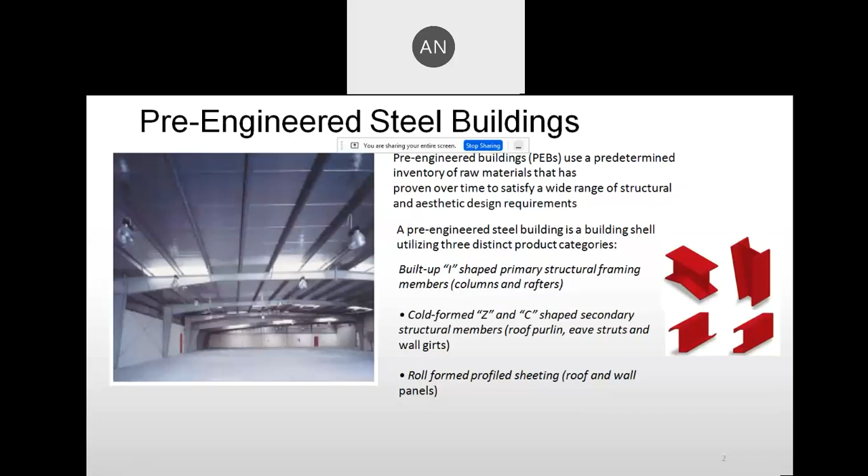When we use tapered built-up primary structural members, when we look into the bending moment profile of a frame, these sections will match the strength requirement. These sections will be fabricated to match the section requirement based on the stresses the building is expected to experience and resist. The profile is matched to that, and if we do that, it gives us roughly a weight advantage of 40% when compared to our conventional hot-rolled sections.

These pre-engineered buildings are made using steel plates - these are all built-up sections. These PEBs can facilitate wider clear span capabilities for major frames.

Longer economic spans are possible, with lower weight of overall PEB steel structure - that is, the tonnage of material consumed per unit area of building construction. The weight advantage in main frame rigid frames, compared to hot-rolled sections, is very pronounced. The use of cold-formed Z-shaped and C-shaped sections for roof purlins or wall girts can also give us around 30% weight saving compared to normal hot-rolled building components.

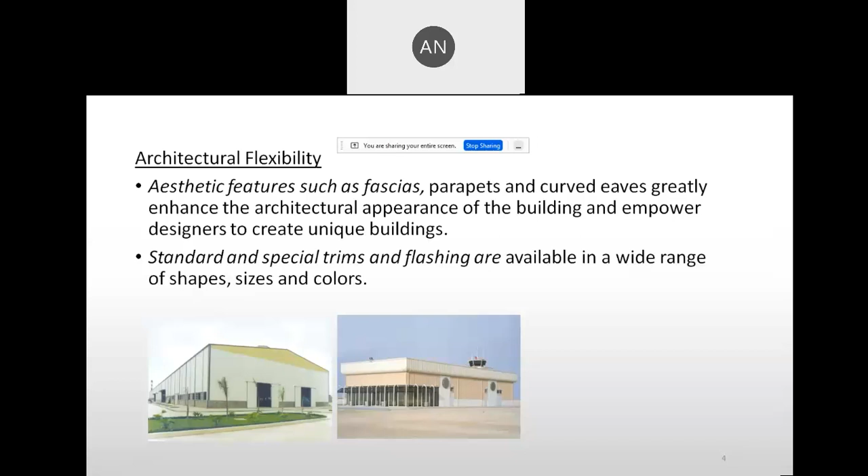Aviation and military - if we talk about aircraft hangar structures, where it demands large clear spans up to around 128 meters, it is possible with PEB.

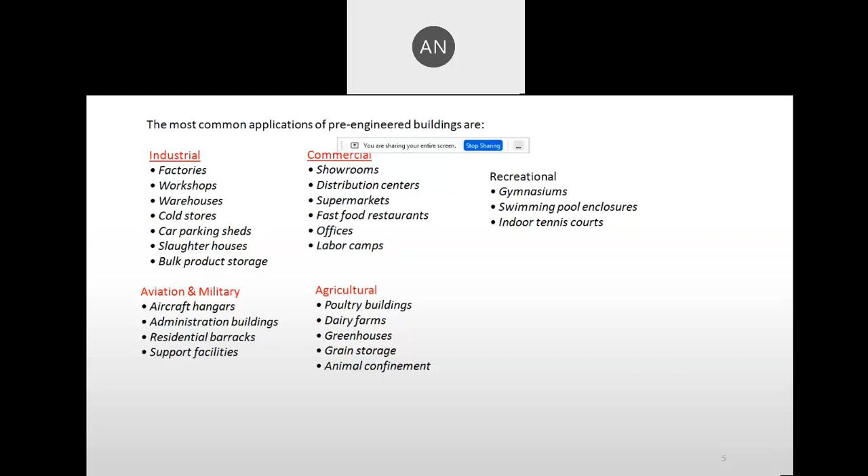Agricultural structures - it could be poultry farms, dairy, greenhouses, yes, grain storages, animal confinement structures. All these things are possible; PEBs can answer them. Their basic advantage is that they can accommodate large clear spans.

Now, there are a lot of configurations of PEB. Usually what you can see here is a multi-gable building with 4 gables each. It is just shown as 4 spans, but it can be multiple - it can go in any number of bays. It can go along, but the only issue will be maintenance.

In this type of building configuration, annual maintenance is very tricky - grit and any deposits in the gutter, in the eaves. There are too many intermediate eaves, so any blockages there, any hauling away of rainwater would be a challenge. Draining away drainage from the rooftop would be a challenge.

Monoslope roofs - you can see the gable roof here, multiple gable roof, one snapshot here. For the monoslope, the frame shown above, the photo need not match, but it's just an indicator as to how beautiful it looks - a monoslope roof.

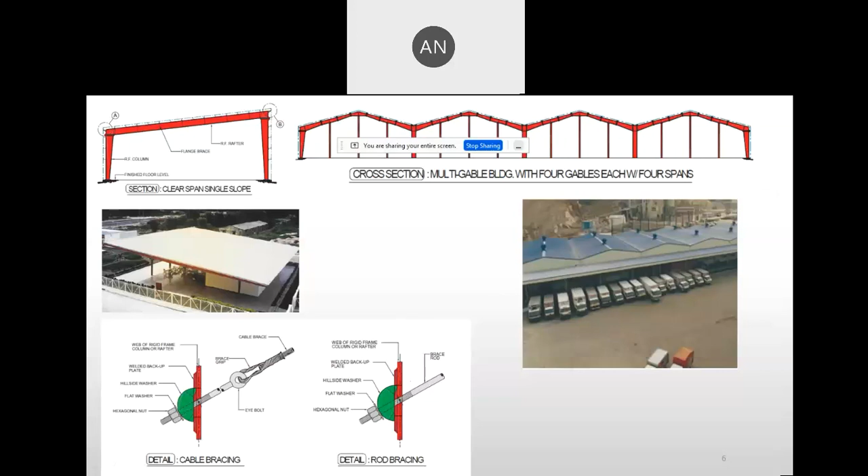In PEBs, bracings are very, very important. Bracing system - we will talk about it in further slides. These are all the general components of a pre-engineered building.

The sketch projected here on the screen indicates wall panels, supported on the girts - G-I-R-T-S, girts or wall or cladding runners. We have roof purlins with sag rods. Sometimes it is also provided with bridges, called purlin bridges or even sag arresters. These are all nomenclatures, terminologies we have to pick up - roof purlins, eave struts, rafters, columns, bracings.

The corner trims - whatever you're looking at in this color, the edges, the corners - these are all called flashings or trims. This is given to prevent any sort of leakages, and it adds to the beauty as well.

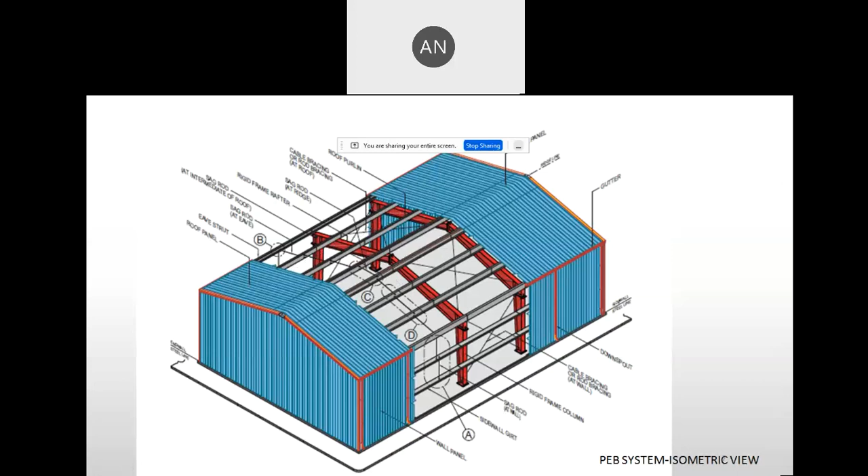These are all the bracing systems. Design of bracing system - it can be cable bracing or rod bracing, or from structural members like angles, channels - all these are used for bracing systems. It depends on the forces encountered in the analysis. It can be tubes as well, pipes, tubes - all these can be used for bracing systems.

If we talk about how the bracing system is fastened diagonally, how its connection is seen, you can see detail C. Detail C gives you the central connection detail - it will have a connecting plate. One bracing member will be continuous, the other will be connected like an angle brace with high strength bolts. This bracing system will take care of lateral sway of the building.

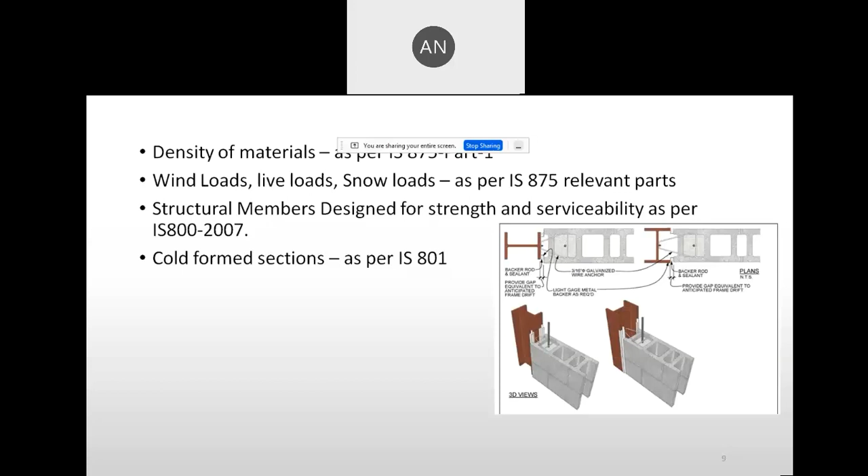There are building codes which we have to use along with these design codes and provisions. Building codes in the sense National Building Code, or it can be Uniform Building Code, UBC. It can be used - it will give us a lot of relevant parameters to be used while designing PEB.

Some certain nomenclatures which is good to know about PEB. Bent plate - a plate bent to form an angle, that is very well known. Whenever there is any angular construction apart from 90 degree right angle, the plates are forged to form that angle and it is used. So it is just a terminology used there.

Bill of materials or bill of quantities, BOQ, that is very much necessary. Once the configuration structural design is in place and all the geometry is fixed, we can arrive at various quantities involved in construction to cost it. So bill of quantities will come into play.

Bill of quantities is nothing related to design - it is more on governance of the project related to various quantities involved in construction. If we look into building components, bird screen or bird mesh - it's a wire mesh fixed over the top of the wall panels under the roof, at any gap, just to prevent any bird from entering into the occupancy area.

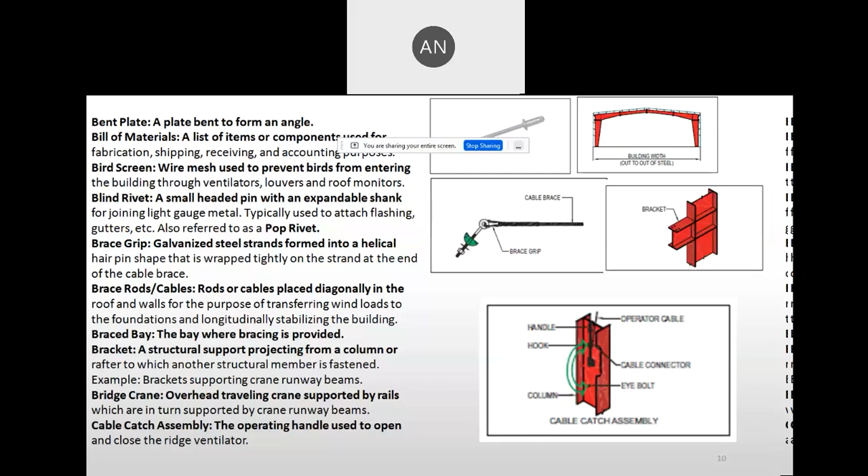Building width is the lateral width of the building measured out to out of the side walls. Side wall steel lines means exactly column to column measurement.

Built up section, all of us know, is a section which is not available in the market but is prepared and made to suit the design requirements using flat plates. They are fastened together, welded together.

Butt plate is again a splicing means - it is also called an end plate. Cap plate is used over columns. Sometimes cap plate is also used at the end of pipe structures as well.

Girt or cladding runners are given to fix - they facilitate reducing the unsupported length of vertical members, and they also help in fixing the wall sheeting.

Building codes, as I said, are regulations developed by recognized agencies establishing - building codes in the sense we have UBC, NBC, all those things are there. Apart from that, there will be certain standardization from some organizations, some local codes, preferences, specifications, or design criteria will be adopted, customized to suit certain requirements - it can be strategic requirements.

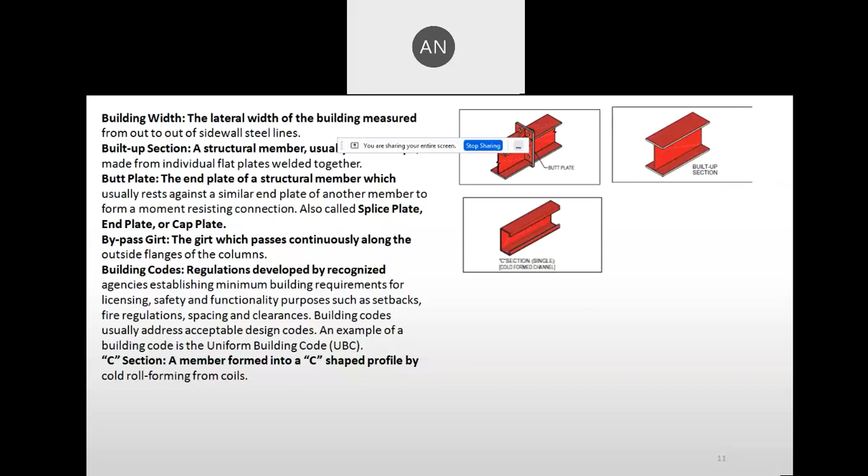Cold form sections in the form of C or Z are formed by cold roll from coils. It is cold rolled from coils.

Cables can be used - the same strands which we use for post-tensioning system can be used for cable bracing system. They are all high tension wires, used for bracing. Likely, if we have inaccessible roof ventilators where it has to be operated, ridge vent dampers or something like that needing temporary bracing, even there relevant cables can be used.

Cantilever, all of us know, it is a projecting beam that is supported and restrained at one end only.

Canopy is also a very familiar name in our industry. Cap plate, we all know, it is the plate which is provided at any one end of the member. They are also referred to as an end plate.

Catwalk is a maintenance platform. It is provided to access the mechanical equipments. Usually it is associated, given along with the crane. It is a crane corridor, adjacent, running parallel to the crane girder.

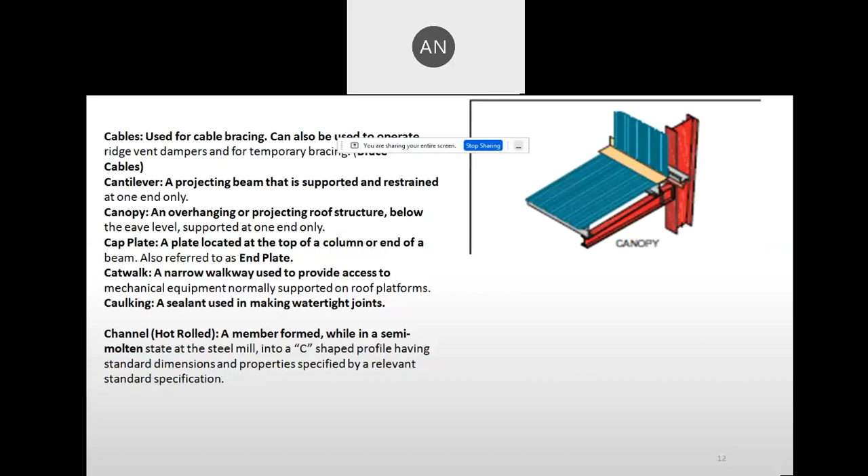Checkered plate, that is also very familiar. It can be used for flooring systems. Usually apart from checkered plate, for any sort of service structures like DG or chiller plants kept over roof, gratings are used.

Apart from checkered plate, which will not drain off any surface water or rainwater, grating can drain it away easily. Maintenance will be very much easy. It is sturdy, can be designed as MS grating floors, or there are heavy duty grating system flooring systems available. It is prefabricated as well, but can be manufactured at site as well to suit the requirement based on the equipment's necessity.

All those things are followed. Clear height of the building is up to the knee from the occupied floor. Clear span is between knee to knee, you can make it out - it is the minimum clear distance available. Clear span.

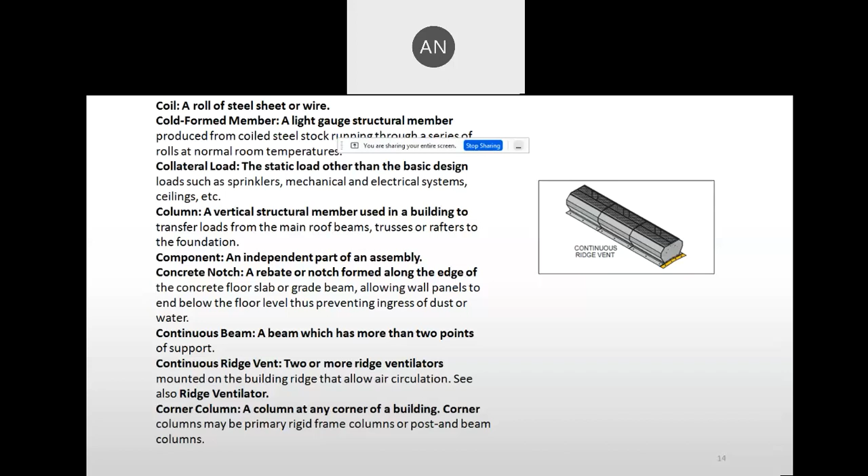Counter flashing: whenever we have buildings with dissimilar heights, where a wall connects to a roof sheeting of the building at a lower level, whatever flashing or trim helps to seal down and prevent any sort of leakages is given there. So counter flashing is given there.

Crane, all of us know, it's a machine designed to lift or move material. This is very much evident everywhere. Crane bracket is a bracket which supports the crane assembly.

Crane bridge can be just one or two girders or box sections. It can be a gantry also, supported on end carriages.

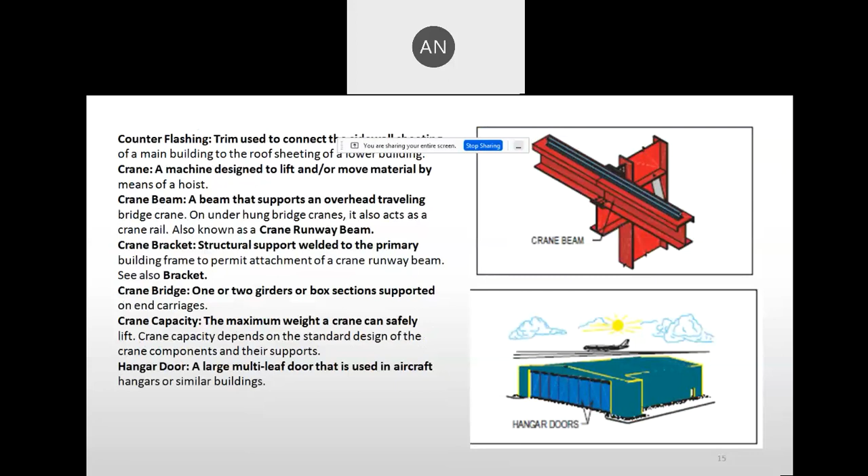Insulation again can be in the form of EPDM rubber, a rubber system. It can be as small as 10mm, or it can be glass wool. This is just to bring down the heat load into the structure.

Splices, again, can be a column splice or beam splice, wherever the sections change drastically. This also helps ease the fabrication at site. So minimum splices are better, but it's optimized to suit the site requirements as well.

Pilot door is nothing but a wicket door, similar to what we call a wicket gate in normal terms. Usually when we talk about large span pre-engineered buildings like aircraft hangars, even the doors are pre-engineered structures, called sliding foldable doors.

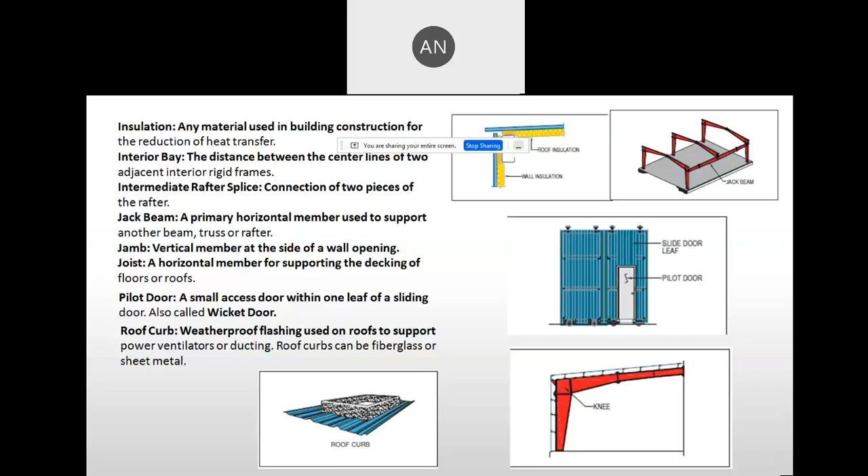I will go to further slides, which cover one more very inviting technology — pre-engineered construction with Concrewall system.

It is called a Concrewall system, not concrete wall. It is a sandwich panel yet again.

These panels are composed of self-extinguishing polystyrene sheets assembled together, and they also have a welded wire mesh. Welded means fusion welded wire mesh, as small as 2.5 mm to 3 mm, closely spaced, with external structural shields like structural plaster, which will go up to around 35 mm.

It is seen to perform very good. These panels, single or double, can be used as a vertical structural component for walls, horizontal structural members like flooring systems, and also for cladding systems, internal partition walls, or it can be customized to even help with certain internal furniture. It can be customized to manufacture furniture like conference tables and dining tables and so on.

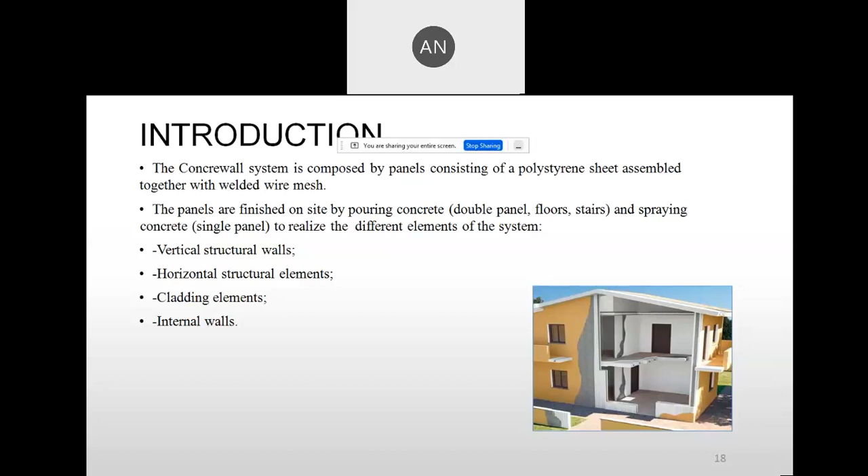Raw material for this is steel, zinc coated steel wire mesh. The mechanical property: 2.5 mm dia is a high tensile mesh with around 700 Newton per millimeter square tensile strength, and yield strength around 600 Newton per millimeter square. For 3 mm dia, only these two diameters are used now - yield strength is around 680, tensile strength is 750. It looks good. Elongation is more than 8%.

Expanded polystyrene is self-extinguishing. It is compliant to most of the international stipulated values, and this material is suitable for building construction. Usually density of the material should not be less than 15 kg per cubic meter, and this satisfies that criteria. It is also compliant with Euro Code of Practice and testing standards.

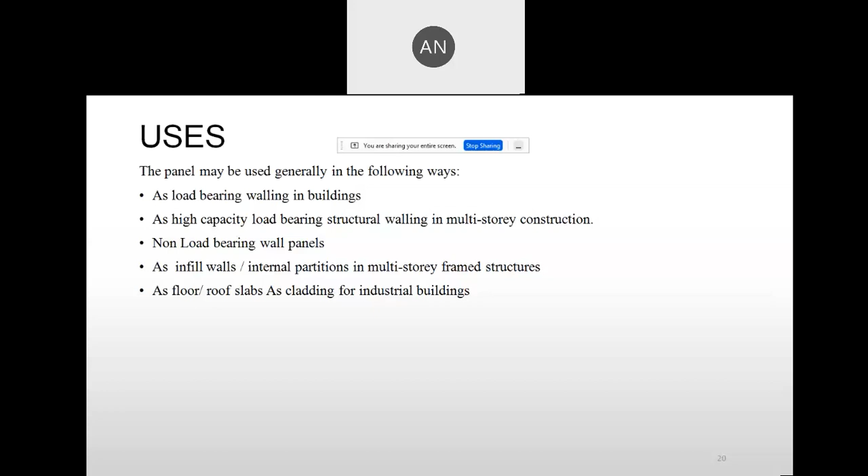Compressive strength of that structural plaster should be more than or equal to M25. So with M25 and these wires together, with the recessions in the expanded polystyrene membrane, it will create a lot of vertical columns and horizontal ribs. This adds a lot of stiffness and strength is derived, and it is called microcolumns.

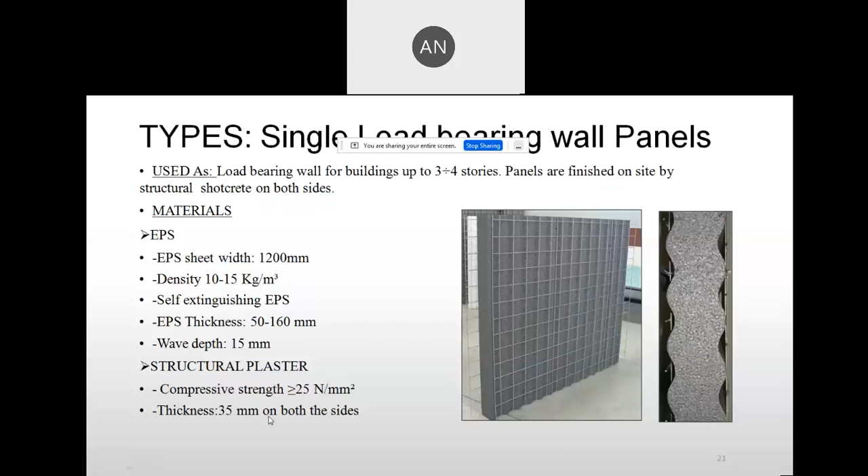You can see these are all real-time photo snapshots from the factory. We have steel wires, which is matching. There is a small extension of the wire mesh, which will facilitate overlap and splicing of the next panel coming and getting attached to this. These ribs here, along with the wire, will form a micro column.

Apart from this wire, there will be a 35 thick structural plaster. Along with this recession and 35 thick plaster, this particular zone will behave like a micro column.

There is structural concrete, structural plaster. Usually it is more than M25, but M15 can also be used. It is not Rck less than 15 - it is not less than 15, it is more than or equal to 15. It's a typographic error.

The structural plaster can be as small as 25 mm thick as well. That means if we can modulate the thickness of EPS along with external plaster thickness, it can answer many requirements. For instance, if it is a partition wall, a minimum of 100 mm wall thickness is anticipated. This 100 mm thick wall can be achieved with just a mere 25 mm plaster, where structural performance is not very much required.

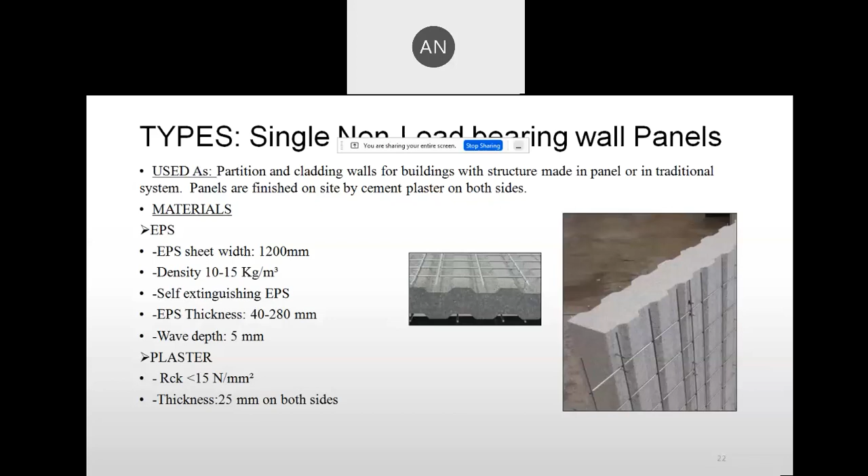So again, it is the same narrative, but with a different thickness of structural plaster. Various possibilities are there - it can be used for floor and it can be used for floors and roofs.

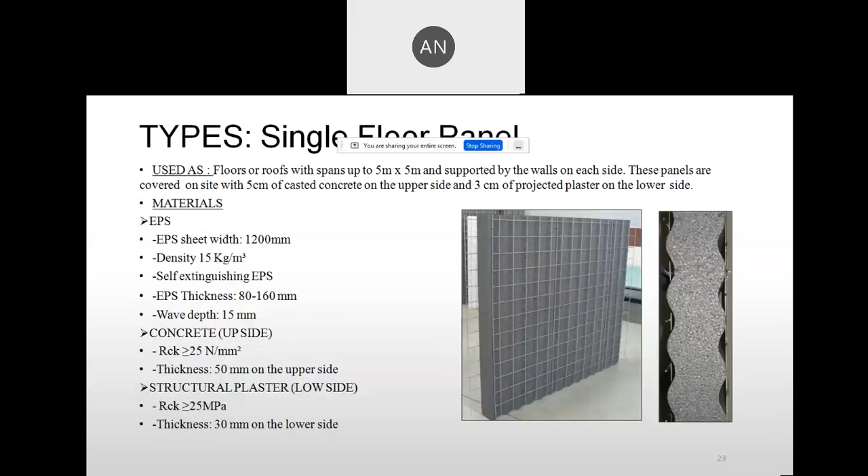This ribbed panel is meant for floor systems. This sandwich panel flooring system cannot totally obviate the use of our normal reinforcing steel, but it will be minimized. The majority of the stiffness requirement is satisfied by the structural plaster along with the high strength wire mesh. Our normal HYSD reinforcement is used just as a coupling or connecting medium, meant for splicing. That's all - its requirement is very much minimized.

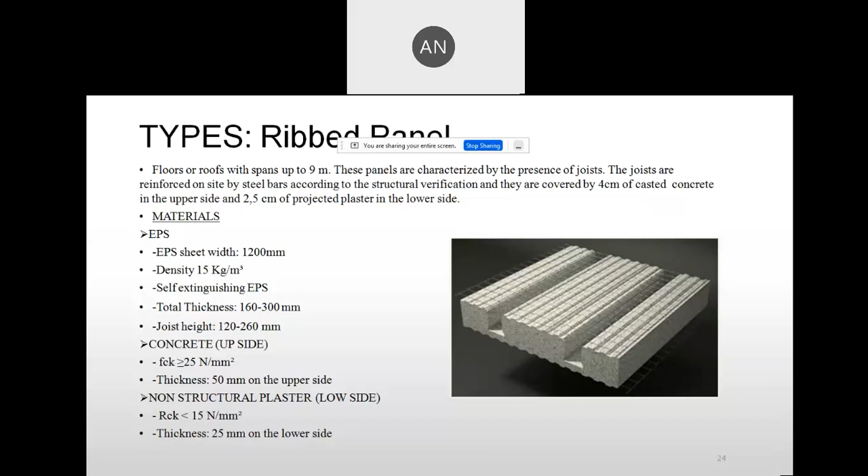This is under research - the use of these kinds of panels to answer the requirements as a shear wall in a building. This research is undertaken by IIT Roorkee, and it is still in process. There is a lot of hope that this can answer many questions.

So the gap between these two panels is concreted, poured to have a very solid and rigid wall structure, which can be used for larger stories, higher number of stories. The same configuration is now being tried over - can it suit the shear wall requirements?

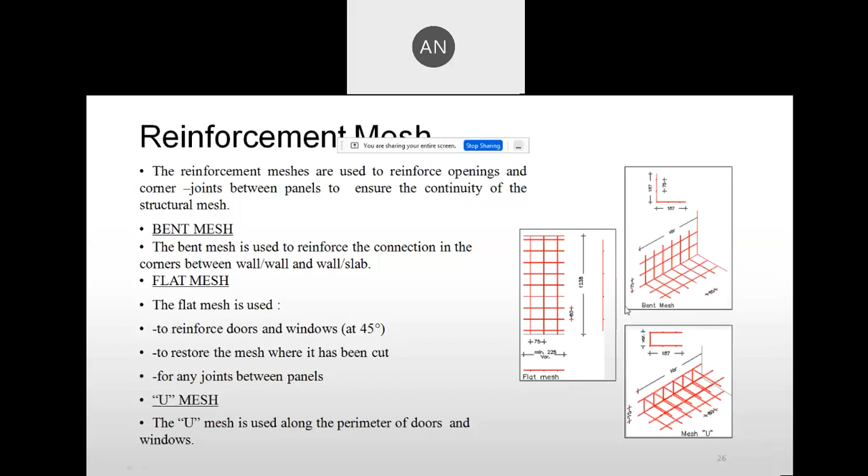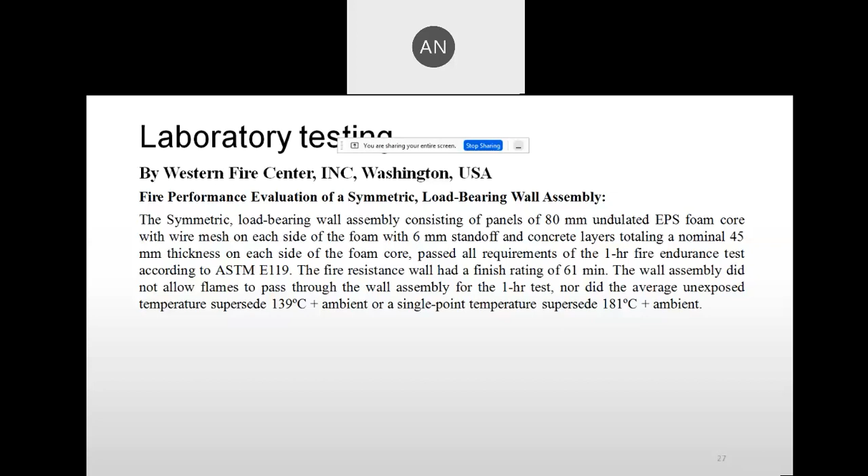Lot of laboratory testing from the other world - all these tests are done to see whether these materials are compliant with various codes of practice. This material has stood tall to answer many of these compliances. It is fire resistant - a 100 wall panel is 1 hour fire resistant, a 150 wall panel is 2 hours fire resistant. It is being tested.

According to Giordano Institute Italy's report, for a Single Panel Concrewall, PCS is the name given to the panel. It is just 80 thick, and its thermal transmittance is only 0.557. Whereas our conventional materials, brick is 0.85 and concrete is 1.5, so we can see there is an advantage in thermal insulation as well.

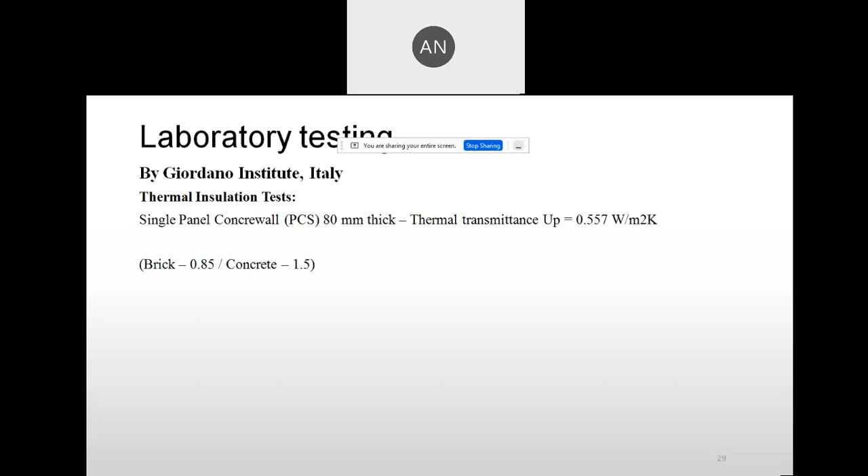On acoustics, in industrial areas the permissible limit is 75 decibels. In commercial areas it is 65 dB day and 55 dB night, while in residential areas it is 55 and 45 dB during daytime and nighttime respectively.

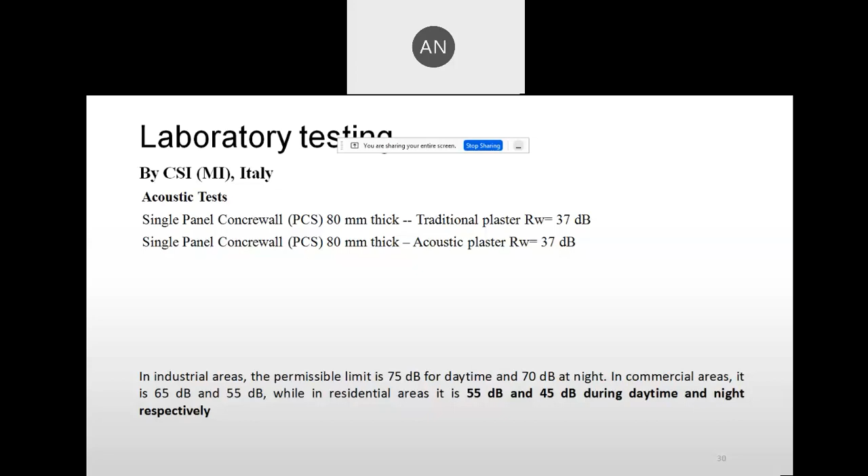But you can see the numbers here, which is really pleasing. A single wall Concrewall panel, 80 thick, with traditional plaster, gives an advantage because of the EPS - 37 decibels, both with acoustic plaster or traditional plaster. These eco panels can offer 37 decibels of acoustic insulation. It is an advantage.

Water penetration test: 3 hours, no water penetration seen. Now trials are underway to test it for a 24-hour water ponding, and it is hopeful that there will be no leakages.

Missile test: again it was tested for worst possible missile impacts, and also hurricane. A hurricane picks up a lot of trees, and once it recedes, it can plunge any sort of broken trees or even metal units into wall systems. Any hurricane of 55 kilometer per hour, it is tested for that. It can take care of hurricanes up to 177 kilometer per hour and up to around 355 kilometer per hour. It is rated to safely take 150 kilometer per hour of hurricane, and it is also tested for impacts. It is found safe. For our normal usage, it is very, very beneficial.

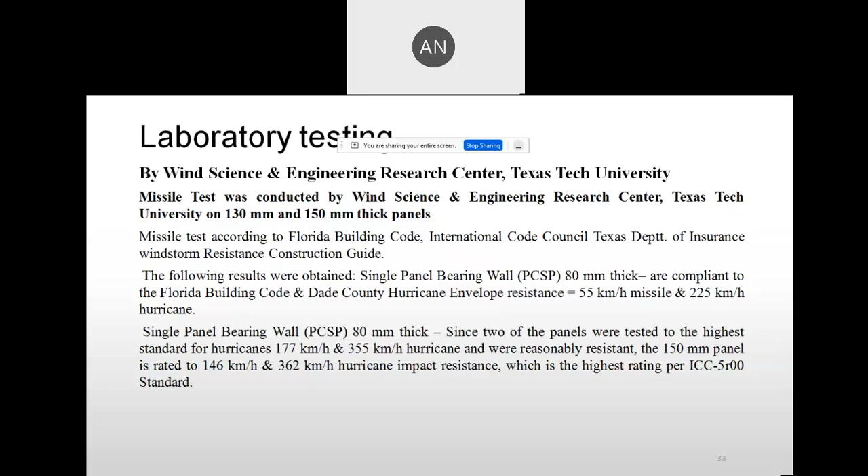There are a lot of buildings tried in Bangalore, in Mangalore district, in Coorg district. There are buildings built using this technology, one in Biddi, it's happening.

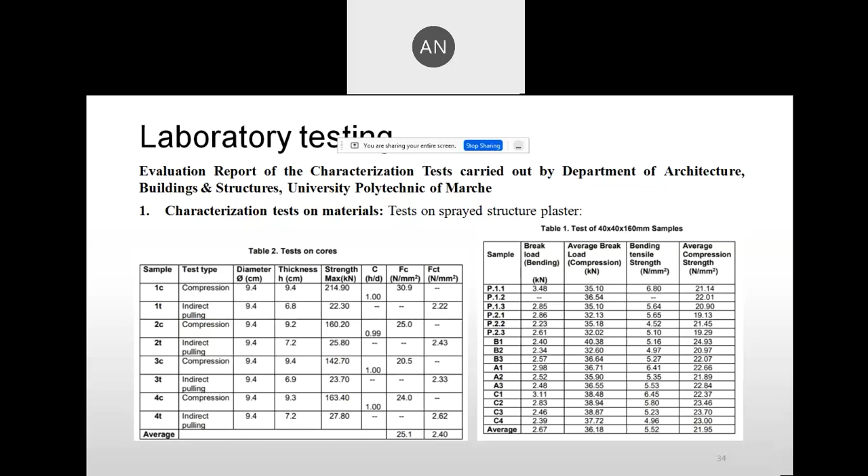There are a lot of tests on the structural plaster as well. All these are found to satisfy, including its strength, its performance, its bonding, and so on. Since this wire mesh is closely knit and fusion welded, the structural plaster is so rigid it cannot yield away easily. It is all electro welded mesh. Even pull out tests are made, and that is found to satisfy a lot of numbers.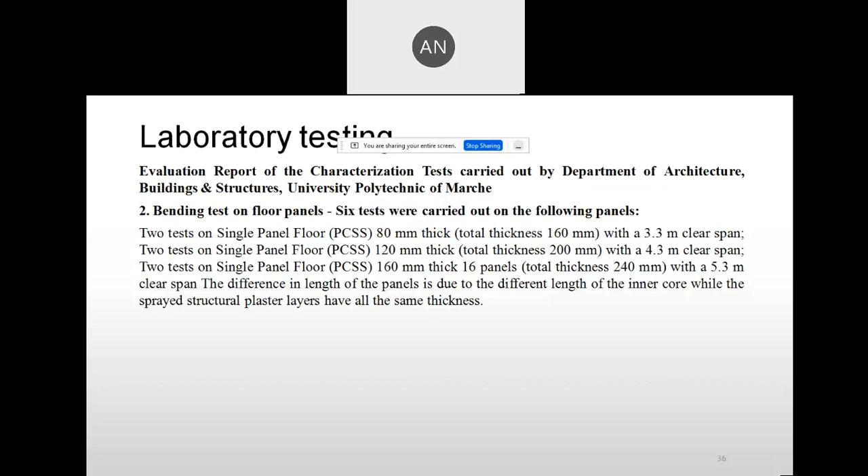Lot of tests, bending tests of off plane bending. In plane bending has got huge stiffness, but off plane bending is tested, which will help to evaluate the floor systems. This is what the test is for - it is tested for 3.3 meters, 4.3 meters, with various thickness. Higher thickness for higher panels. It is designed and used, and this is expected to answer most of our routine loading patterns, including pattern loading.

It is a 10-year-old technology to the world. 6 tests were carried out in the following panels, and again bending tests, as I said, a lot of engineering parameters are derived. It is all found to answer, all found to fall in place, all compliant.

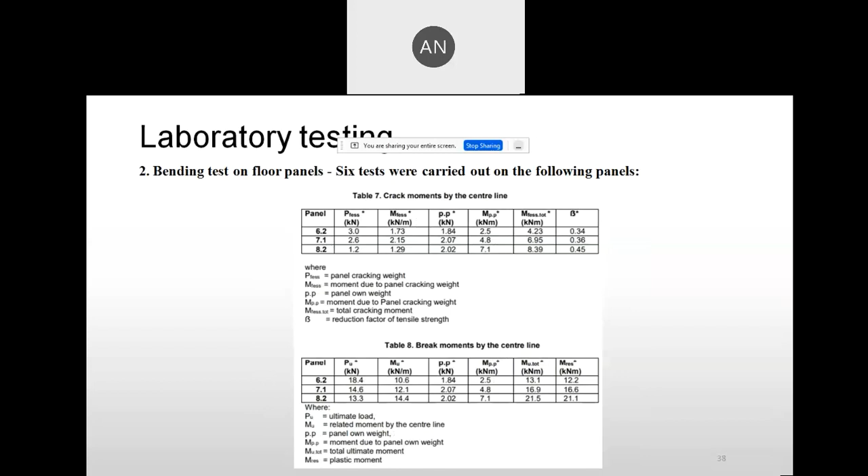Bending test on floor panels. Again, compression test - crushing load, what crushing load it can take.

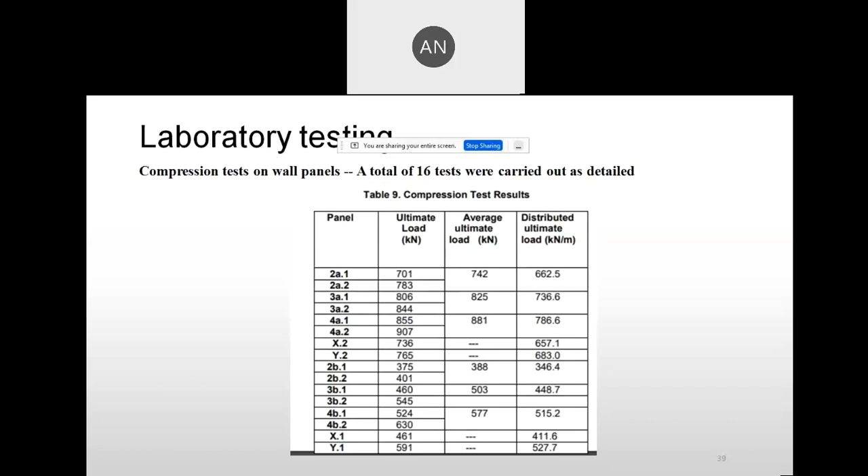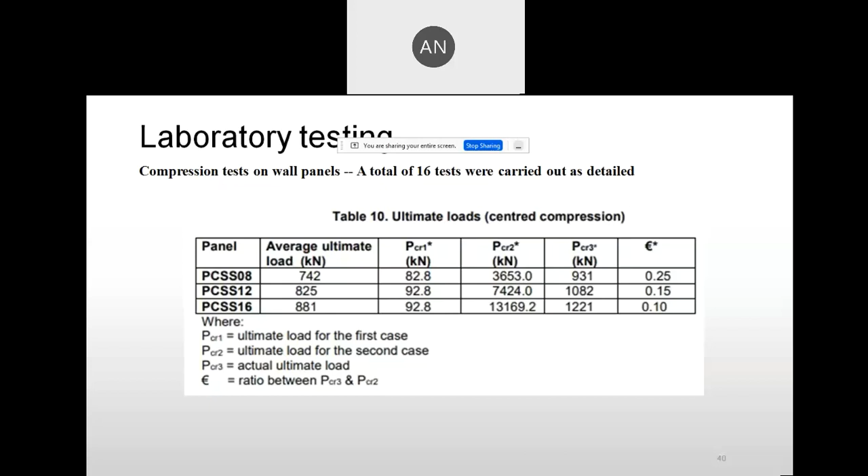Diagonal compression and diagonal tension - all these when we use it as an infill, when you integrate it with the structural frames. This can be used as a framing system for normal buildings, and as an infill to a multi-story building as a facade or an infill. When integrated with the frame and subjected to lateral forces, it will experience diagonal compression and tension, so how will it perform under these situations? Even that is tested.

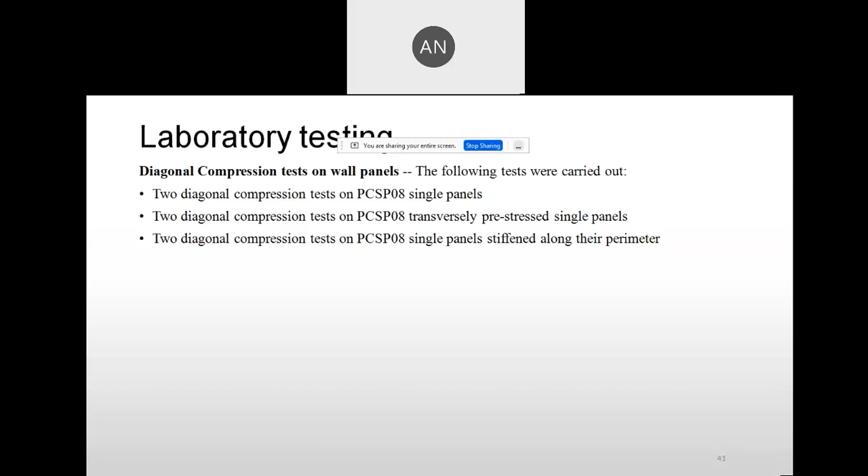Diagonal compression test results. Tests on wall and floor joints - one test on a joint where the floor panel's upper face was tied, meaning these wall panels may not always sit on the bearing surface; it will be just connected on the surface. So when it is connected only with the inner surface, inner layer of the wire mesh, what happens if it is connected to both wire meshes, front and rear side? Those are joint 1 and joint 2 - just surface connection and also complete bearing connection. These two are tested, and this material has passed those tests as well.

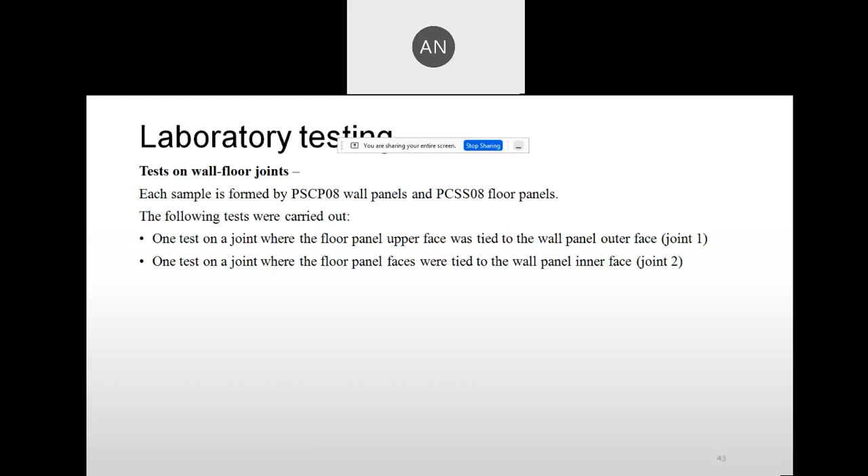We are already trying this material, this construction material, in two of our sites, where the soil is as poor as it can only offer 2 tons per square meter SBC. We are improving the ground bearing capacities by using stone columns. Over that a base raft, and on that we are planning to have these wall panels. The overall self weight of the structure is expected to bring down drastically to half at least, maintaining the stiffness.

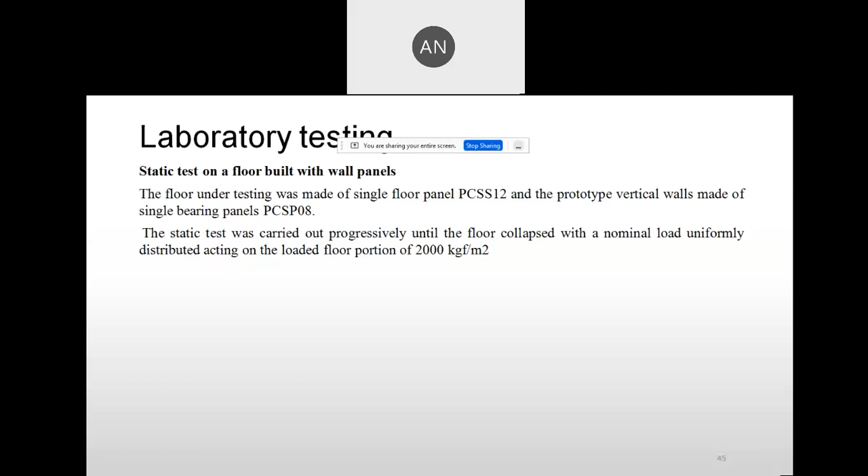Static test on floor built with wall panels. When floor along with walls, how does it perform together? 2000 kg per square meter. Here only the aspect ratio is missing, which I will get later. But it is tested for normal spans, various aspect ratios in step values, and finally it is reduced. Normally it can take up to around 2000 kg per square meter. A 200 thick wall panel can take up to 2000 kg per square meter force, distributed force. These are all designed to suit based on the floor occupancy.

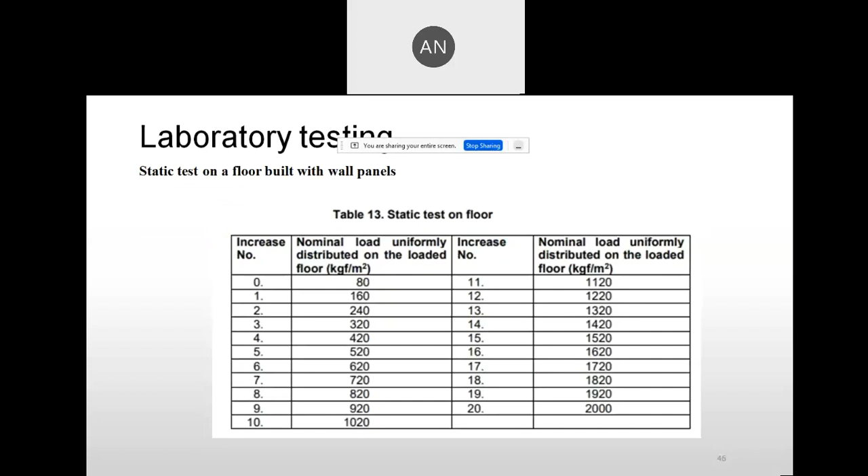Again, test results, lot of test results, which is now behind a lot of projects happening now. Housing projects, multiple housing projects, cost-effective housing projects. Whenever time is the essence, usually cost per square feet with these roof and flooring panels may not differ that much from our conventional construction cost per unit area, but this is faster to occupy. That is an advantage. There need not be too much cost difference when compared to conventional construction, but this can save a lot of time.

Now, how are these panels assembled? A floor, normal foundation - these foundation systems can be with these wall panels only. Double panel, usually for foundation systems double wall panels are used, which will behave like a formwork and also an external sheath. Later on it is poured with structural grade concrete. Over that, these wall panels can be spliced, can be fixed.

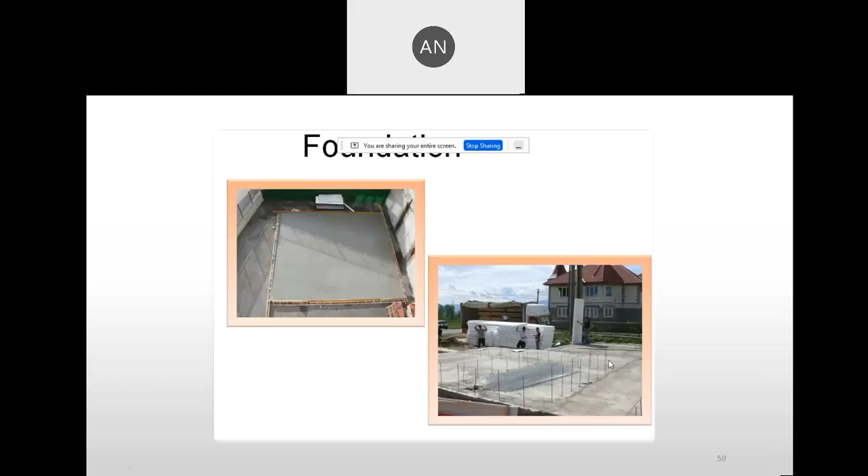This is an indicator, just a snapshot as to how these dowel bars come from the base raft. This is the normal base which is developed. It is not necessary that we need to have this base raft. We can also do with only framework up to ground level, like columns with plinth beams. Over that, the complete structure can come over these wall panels.

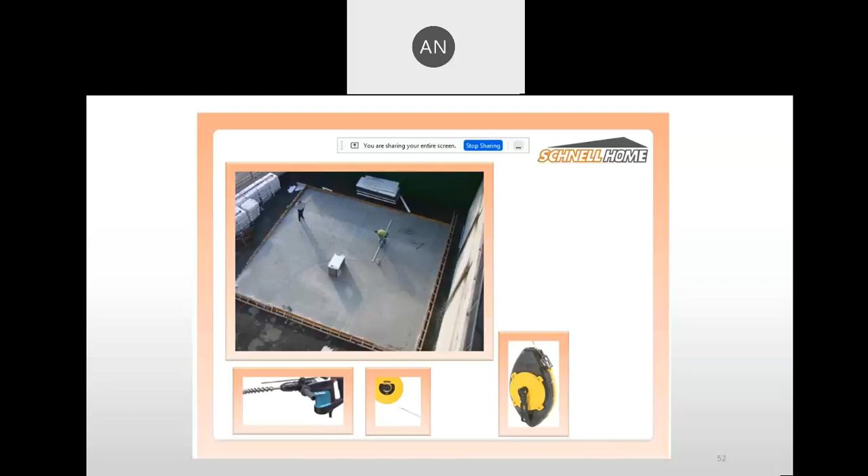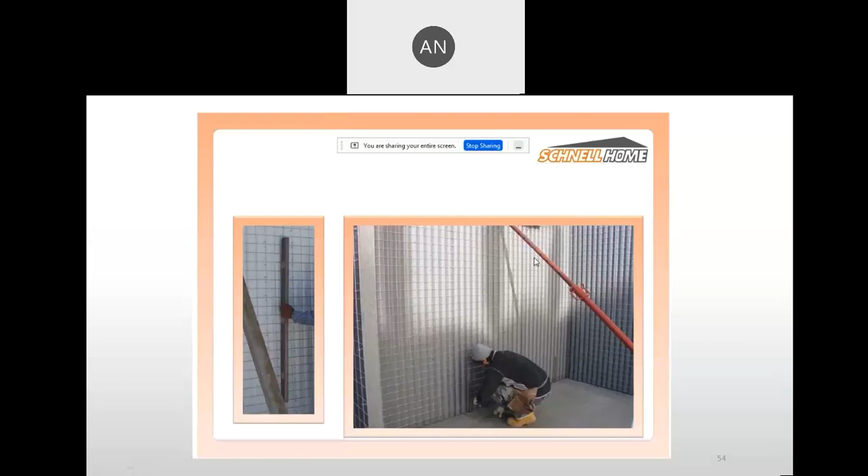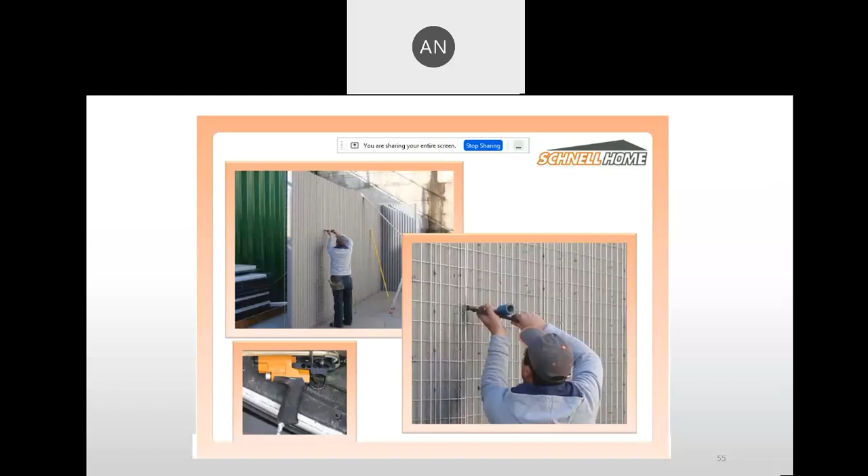This is how two panels are clipped together, one panel to the other. Overlapping wire mesh is tied together to integrate. These are all the diagonal mesh at 45 degrees, which is fixed over the opening. You can see that along with the corner mesh, this is also along with the U mesh, which is given at the jambs and reveals.

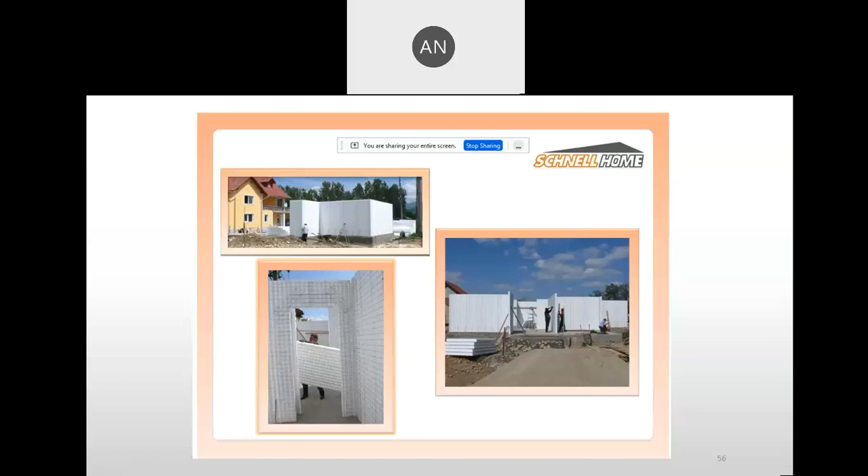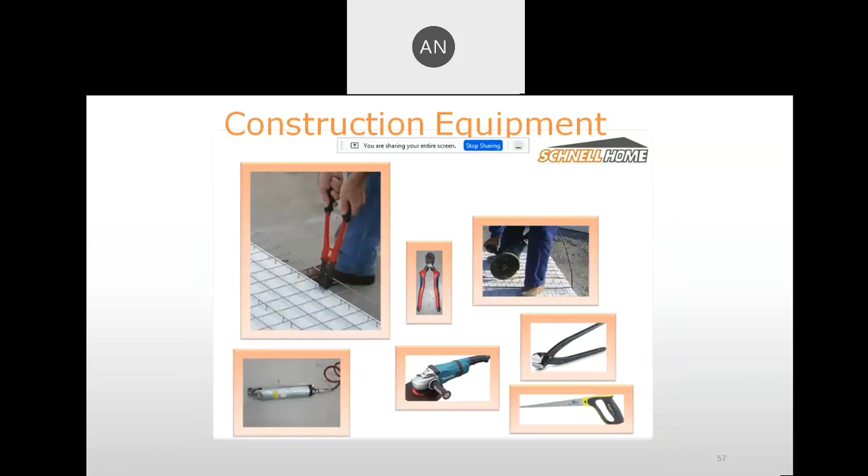Tools used: the clips, pliers, and so on.

This is all the wall panels after connecting, shown in the bottom right portion. This is the wall panels after the tying and meshing work is completed. After connecting, this is how it looks. Before concrete is placed, to prevent any disarrangement, the wall panels are secured like this.

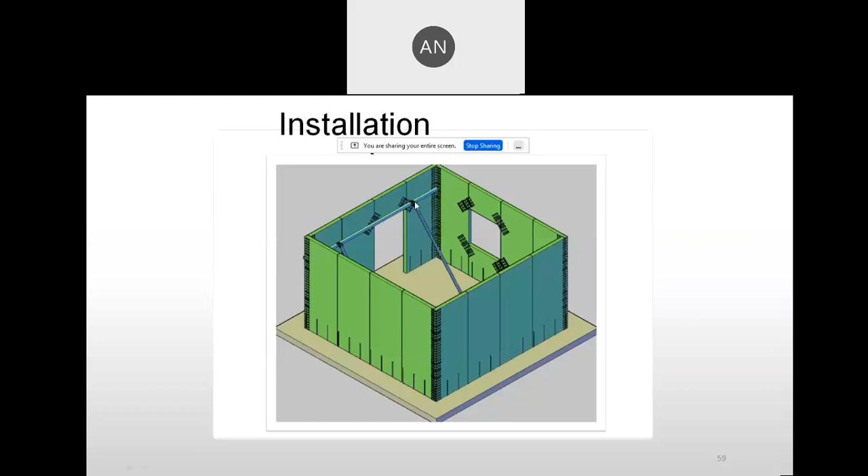Corner meshes you can see, inside and outside both. It will prevent any cracks after it is fixed in place.

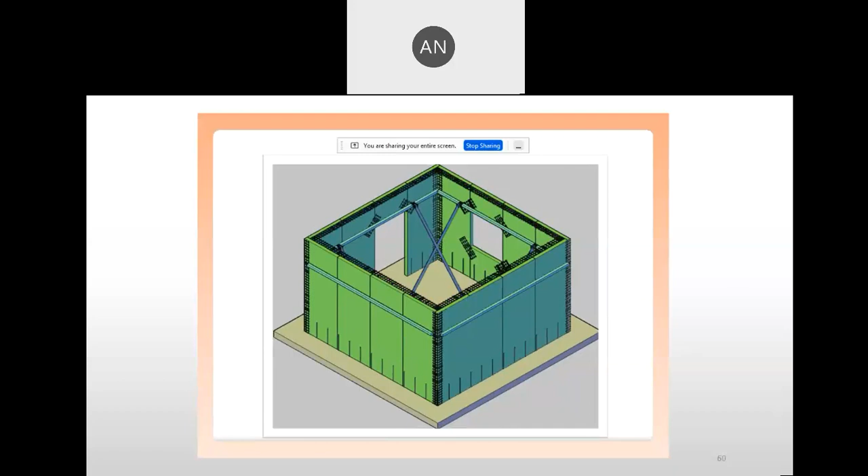This is how it is supported, shored like this with runners. You can see the same thing here, how it is done. Before gunneting, all this is done.

Once this is secured, gunneting is started. Gunneting happens in two phases: one is the structural grade plaster, over which only 15 mm finishing plaster will come. Both of them can be gunneted.

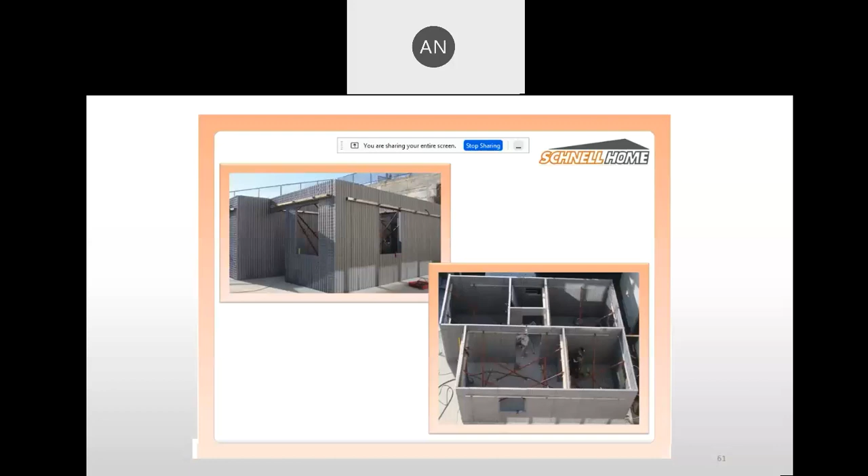This is the gunneting photographs. You can see how it is done.

Once the wall panels are completed, we can think of having the floor panels. Once the bottom runners are kept, no specialized shuttering is required. Only additional ribs and runners are needed to facilitate placement of this. That's all, once the runners are there.

These wall panels are kept in place. Joints are secured, and topping concrete is placed. Later, once this sets, this can be removed and taken off.

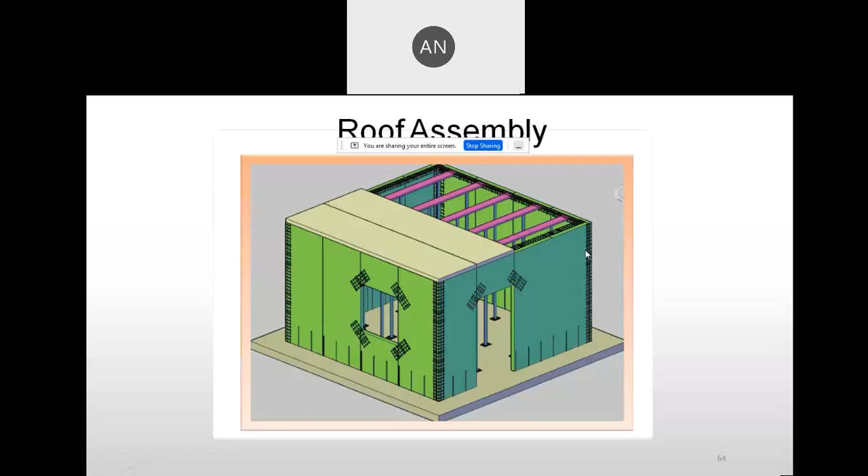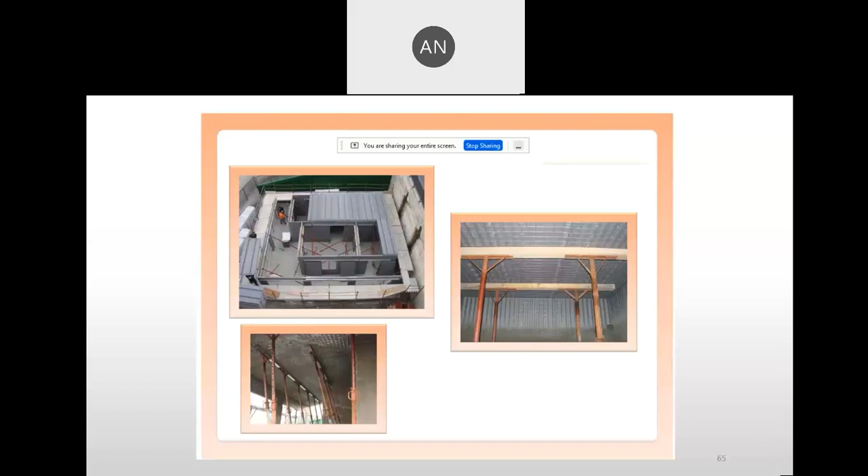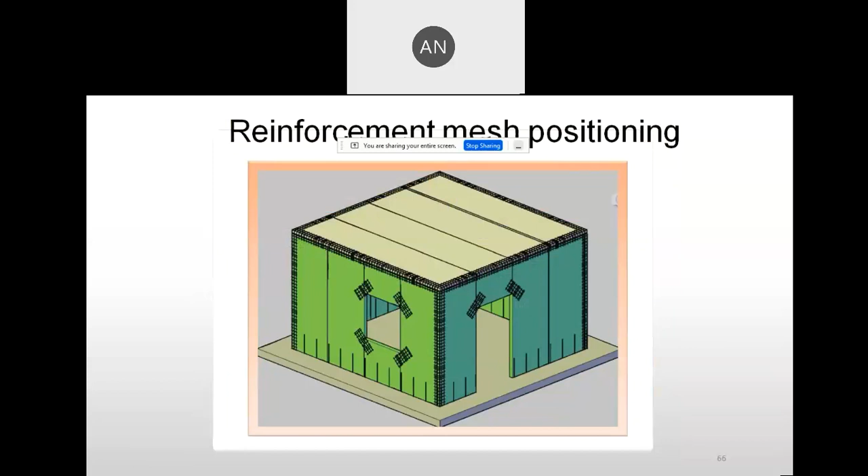How are the mesh positioned? You can see all the corners and diagonals are secured.

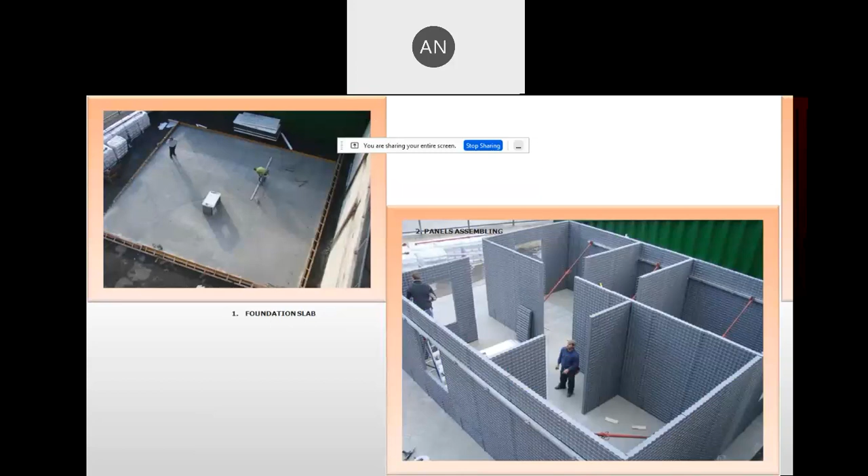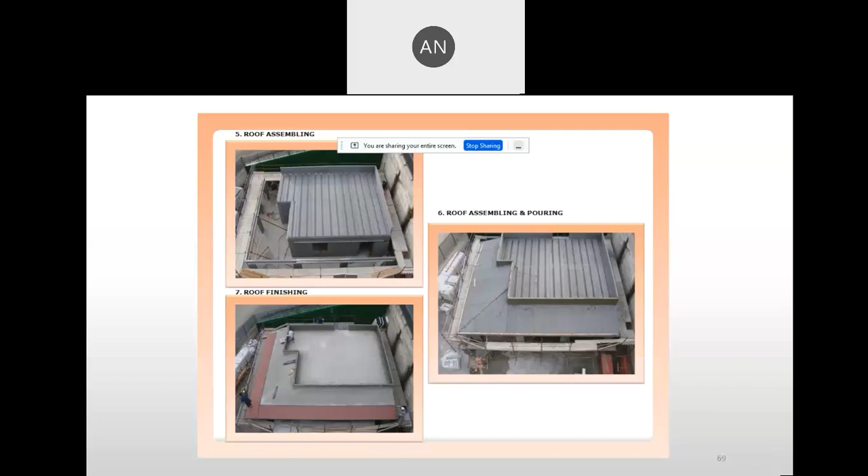At window frames, after finishing, this is how it looks. After that, once the guniting is over, the plaster finish is made. Tiling is done on top of it. It accommodates everything - you can see the final product.

Right now, this product is compliant with most of these codes and is now put into practice, and it is answering well. Buildings constructed with these panels are leak proof, meaning they are damp proof. So, compared to normal plastered brick wall or block work, RC wall, or porous RC wall, all the related problems associated with those conventional materials are one by one answered by these panels, and it is showing good signs.

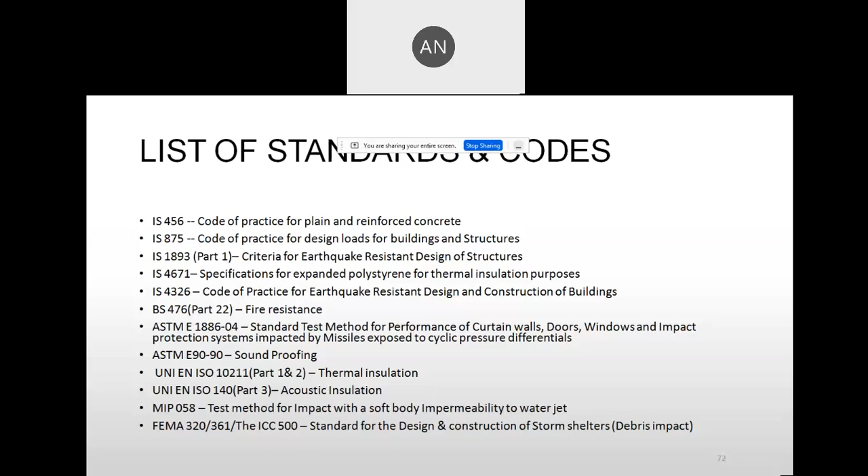This concludes the discussion about a pre-engineered building.

I would like to present an extension to what you have all seen and heard about sustainable buildings, how it is practiced right now. I wanted to present this, if time permits.

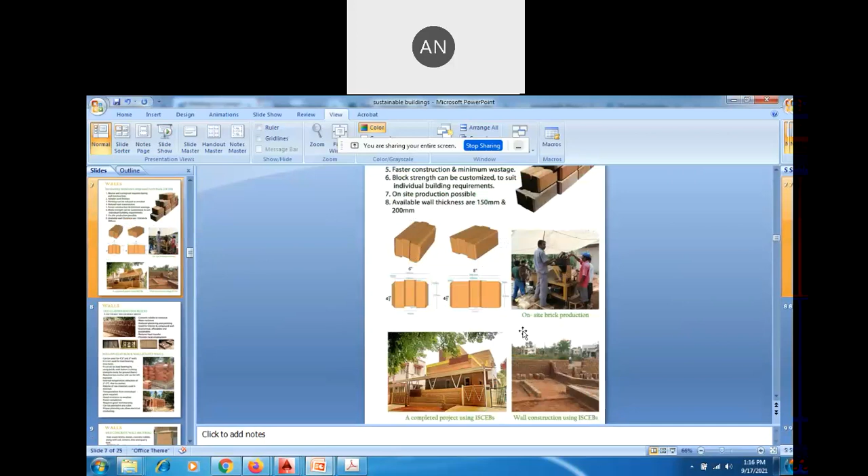Can I present that? Sir, if it can, sure, be yeah. Sir, you can wind up, continue - in about 5-10 minutes I think I can go ahead. Sorry, can you please be louder? Sir, if it gets wound up in about 5-10 minutes, then probably we can go ahead with that, sir. Yeah, I will see if I can. I just wanted to highlight a few things. Yes sir, no not a problem, yeah sir. Can you see my screen? Yes sir, it is visible, visible.

Yeah, there are a lot of things to say. So, sustainable buildings - usually when we talk about construction cost per square feet, what is the best configuration that gives minimum cost expenditure per unit area of construction? Over a period of time, experience shows that if you build a G plus 2 structure - ground plus 2 - it is an optimum configuration, giving a good tie between cost per unit area and optimizing cost expenditure for whatever occupancy you are building. So usually in sustainable buildings, this configuration is pretty much followed.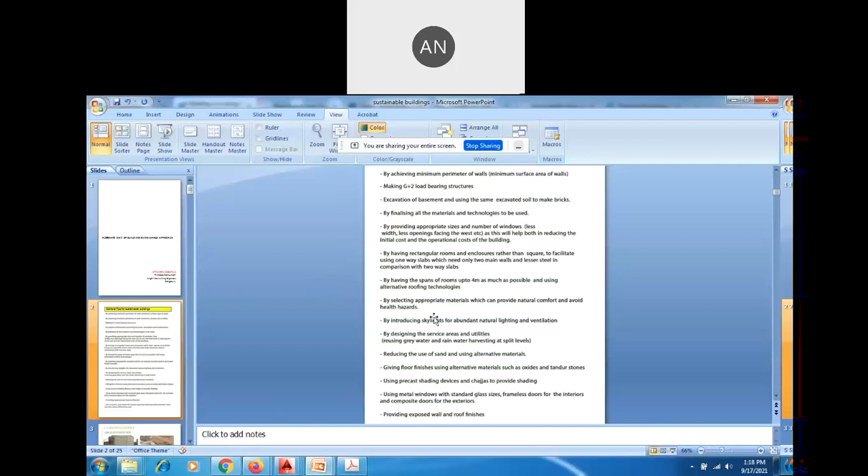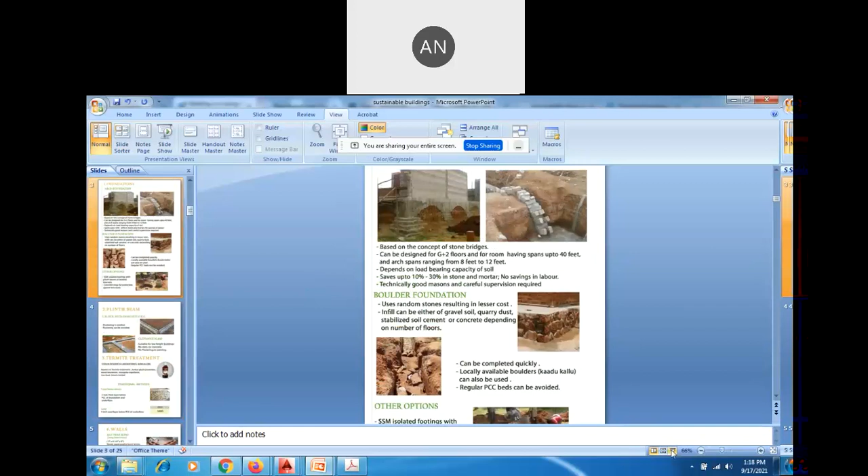Abundant lighting is what is necessary when we talk about sustainable buildings, using naturally and locally available materials for foundation systems, like using an arch system in foundation - arch foundation. This is also possible. These are all applications which are followed and done, these are all site snaps taken, which are followed. These are all possible in our sustainable construction systems and methods.

There are a lot of answers for our conventional foundation questions, our normal footings, RC footings and columns. Using these kinds of alternative systems will certainly bring down the cost of construction.

For single story buildings, using Cuddapah stones without plinth beams, using only U blocks, it is possible.

For anti-termite treatment, we can use herbal pesticides instead of going for ground abusive chemical pesticides. We can use neem leaves spread for anti-termite treatment, done for the floor, at the stage of foundation construction or prior to flooring. Whatever anti-termite treatment you do, this is an alternative good approach.

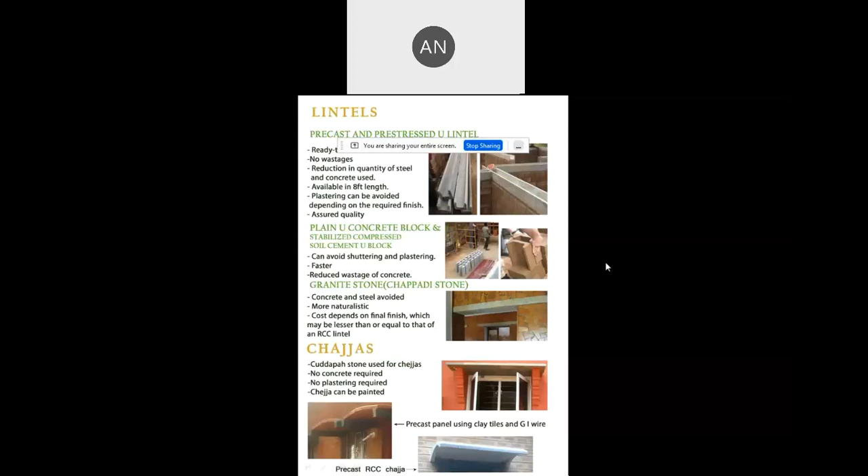Lintels, precast lintels - that is also possible. Doors, pivoted doors without frames - that will bring down cost.

Pivoted doors means no frame. It is pivoted on the jamb, that's all. You can see it is pivoted here and here.

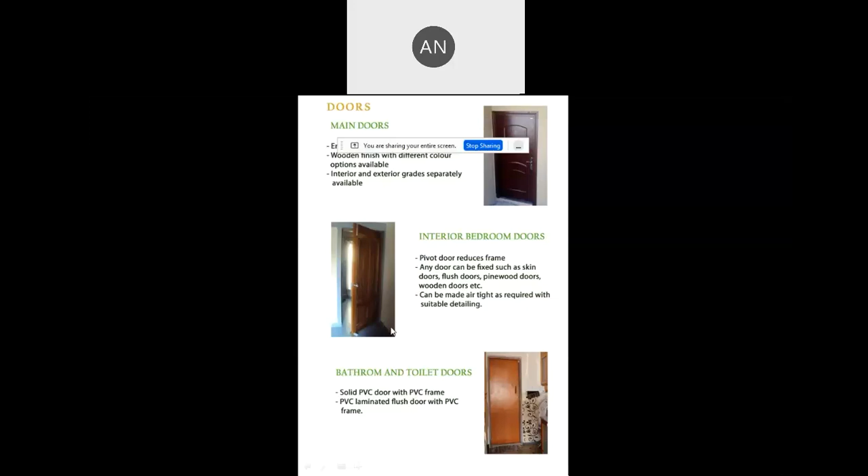Using NCL windows, clay jaali works.

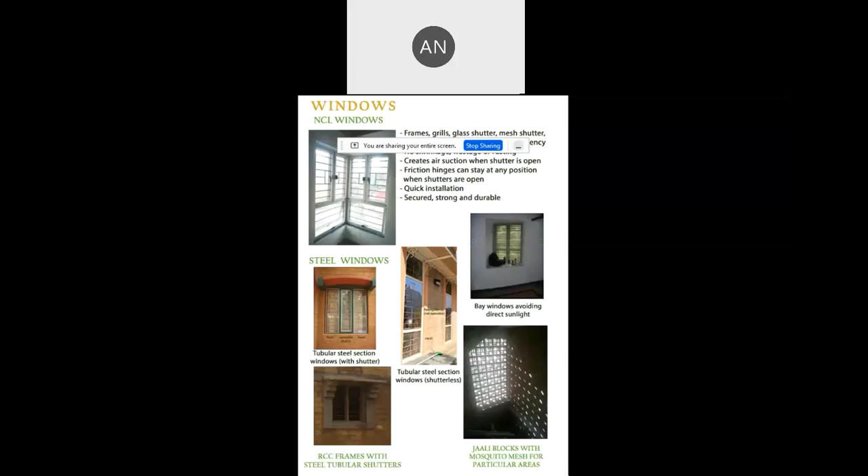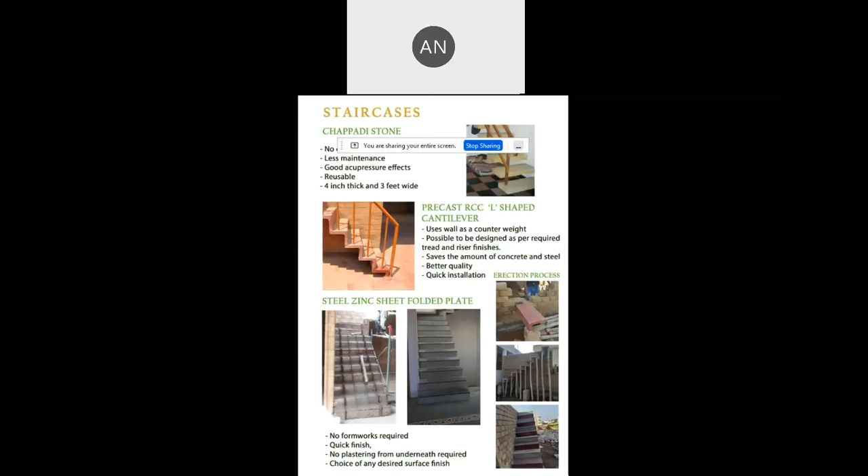Precast members - we can use normal stone blocks for staircases, or use L-shaped cantilever precast RCC steps. It's just brought in and fixed at site.

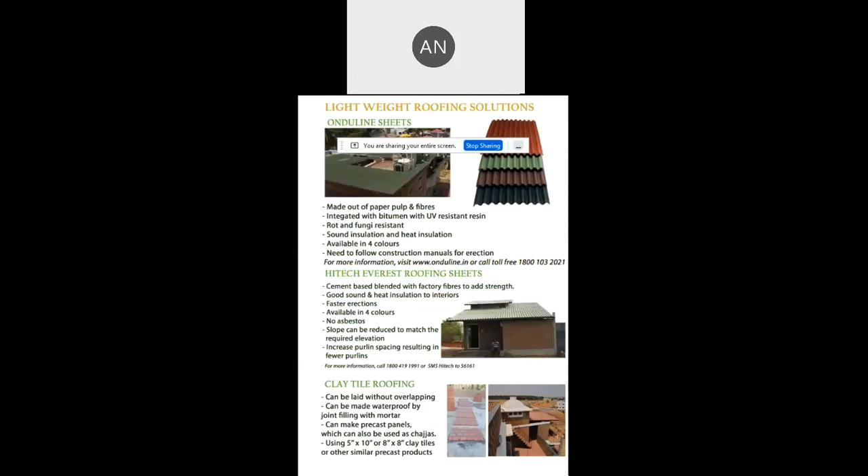Micro concrete roofing. Roof sheets are available, we can use them for bringing down cost. Everest roofing sheets, clay tile roofing is quite conventional.

Onduline sheets are made out of paper pulp and fibers, so they are UV resistant and fungus resistant. They can offer a lot of sound and heat insulation, available in colors, so we can really use it. I have used it in some of my projects.

Arch panel roofs means the soffit is made into an arch, and while topping it with concrete, it can be made into an occupiable surface. That is also possible.

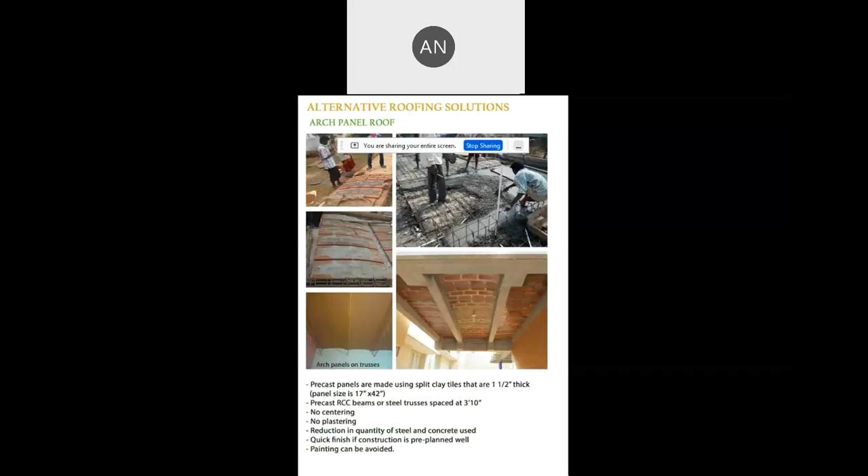T-beams, inverted T-beams, called precast. It can be RCC precast T-beams, or even clay T-beams. In the troughs, you need to introduce certain pre-designed rebars.

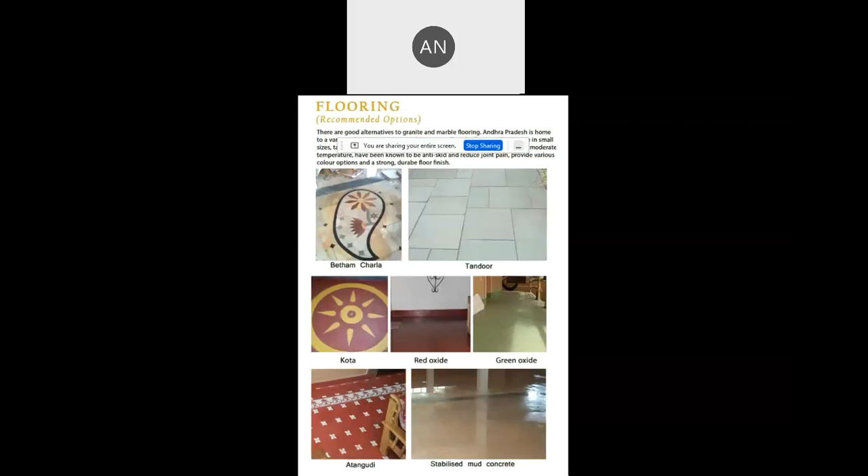For flooring, we can go with green oxide or red oxide flooring, Atangudi flooring. These are all good alternatives for granite and marble flooring.

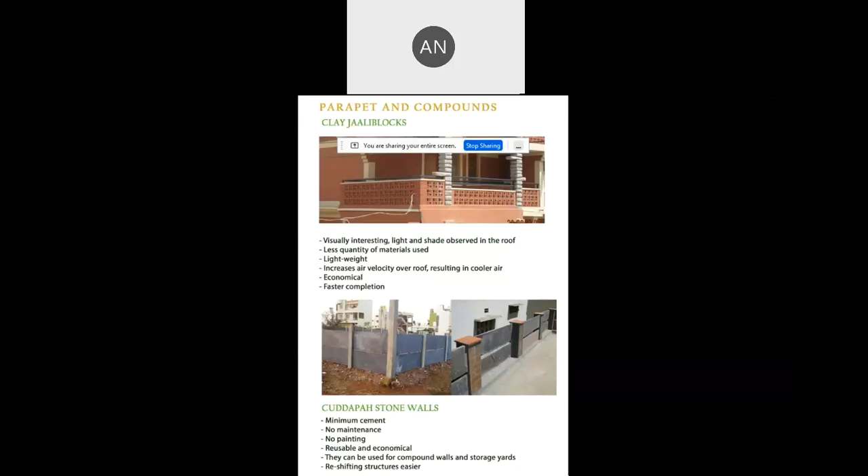These are all some buildings which are already standing tall with glory. Sustainable buildings are always handy - it is affordable if locally available materials are used.

With lot of thought and interest shown, we can design buildings which can be sustainable. Even rainwater harvesting systems can be planned very beautifully to make the building sustainable. There are a lot of opportunities today.

Only thing is, it has to be taken up. People have to snap out of our conventional exposure, conventional building systems. This is a safe and very livable housing system - it is possible to have a glorious house with most optimized expenditures. Thank you very much.